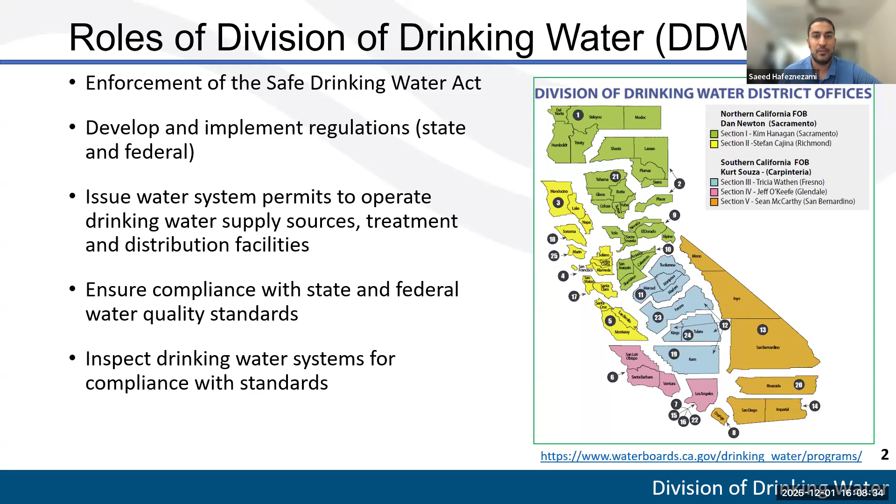So the reason I'm here today is because Santa Clarita SCV has applied for a drinking water permit amendment, which we have been evaluating and preparing the permit for some time now. So here's a little bit of our philosophy on impaired sources of water. So DDW's goal is to assure that all Californians have access to a reliable supply of safe drinking water. And accordingly, it is our stance that the best quality sources of water that are reasonably available to a water system, to a water utility, should be used for providing drinking water.

Extremely impaired sources are those sources that contain or are likely to contain very high concentrations of contaminants, multiple contaminants, or unknown contaminants. An example of these sources are groundwater sources that are subject to contamination from a contaminated site. So we also recognize that in certain cases, the water produced from treatment of these impaired sources can be a potential resource for water systems, especially when other available supplies are limited.

And that's where this process memo 97-005 comes into play to address the inherent risk of using these sources by establishing steps to review and evaluate the proposals for using these extremely impaired sources in a safe manner. So what is this process memo 97-005 that I keep referring to? This is a guidance that was issued to the drinking water program at the time back in 1997, which is now called the Division of Drinking Water. This guidance was issued to our staff on how to permit the use of extremely impaired sources of water for domestic use.

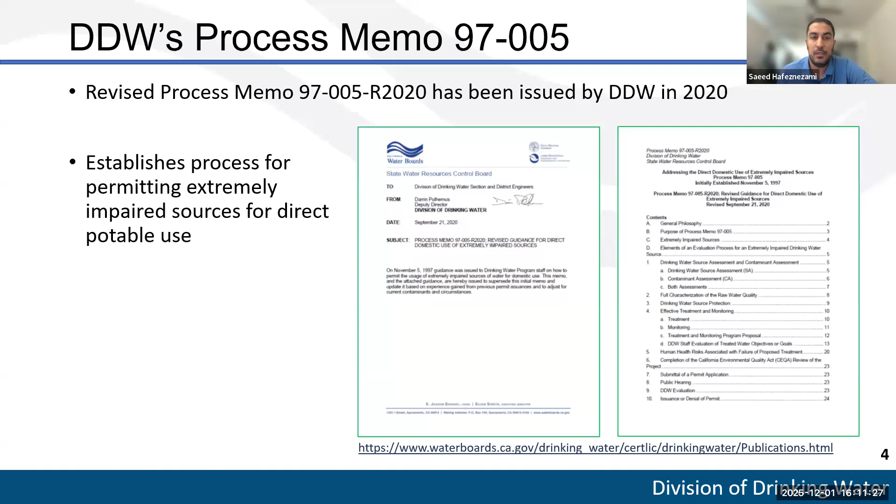So this is just an overview, a summary of what this 97-005 process entails for permitting extremely impaired source projects. I'm just going to briefly go over the overview, and I'm going to spend a little bit of time on each step. But basically, a water system or a project proponent that wants to use an extremely impaired source of water must undertake various steps to gather information and prepare technical reports that summarize the outcome of each of those steps. And these technical reports will be submitted to DDW to help us review and evaluate the permit application. And these are the key supporting documents for us to use in our permit evaluation.

So this process is a hefty, lengthy process. It involves receiving and evaluating an extensive amount of information, data, analysis, and conclusions, prepared by the project proponent and reviewed by our DDW staff. And depending on each project's specifics and specific circumstances and details, we determine whether all or some of these steps are required. These various steps are listed here in the order that they need to be completed. And it starts with drinking water source and contaminant assessment, followed by characterization of raw water quality, source water protection, effective treatment and monitoring, and a risk assessment for the failure of proposed treatment if warranted.

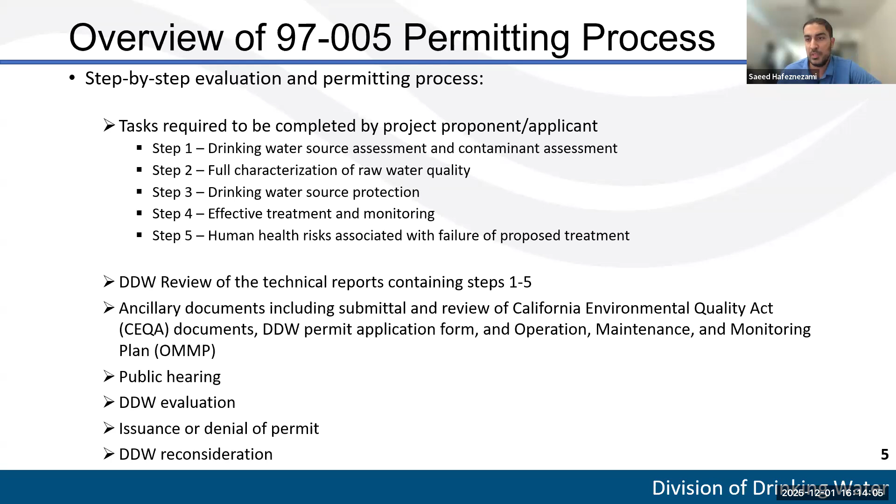And I just want to point out that these steps in this evaluation process are sequential, meaning each step relies upon the findings and conclusions of the prior step. So these are the major 5 steps in the 97-005 review process. And besides the completion of these steps and the review and approval by DDW, there are also other documents and steps that need to be completed prior to issuance of a water supply permit by DDW. And these steps include preparation of CEQA documents, permit application, preparation of an operation, maintenance, and monitoring plan, and also holding a public hearing if deemed necessary by DDW. So that's the reason we are here meeting today, because we require a public hearing as well.

So I'm just going to spend a little bit of time going over each step of this process. The first step is an assessment of the impairment or the contamination. The objective of this step is to know what contaminants are present or are likely to be present at the source, impacting the water source, and also into the future. This is the foundation of all subsequent steps.

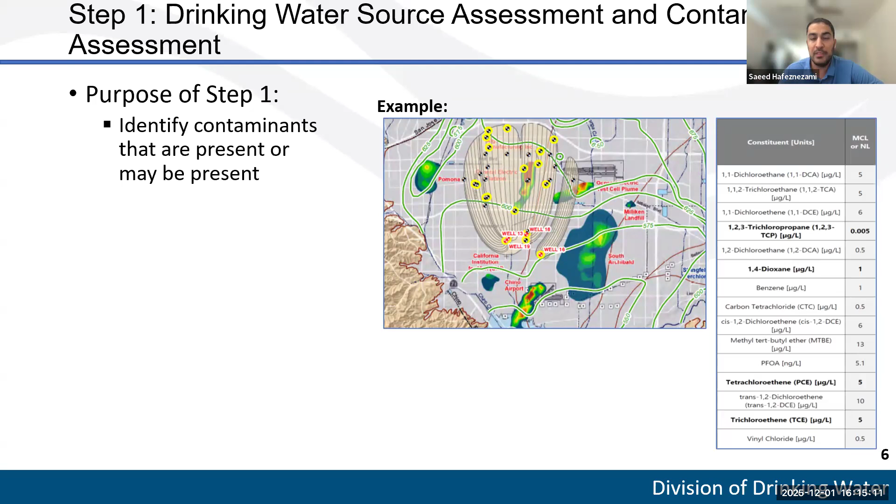Here are some illustrative examples of outcomes of this assessment. These examples are not related to this project, but these are some of the outcomes of this process that we expect to see: maps showing the extent of the contamination plume and tables listing the various contaminants of concern for the specific project. And like I said, a lot of time and effort goes into preparing all this information as well as reviewing it.

Step 2 is characterization of raw water quality. The end product of this step is estimating the contaminant concentrations that will be fed into the treatment system. So the project will need to determine all the contaminants that are currently present or will be present in the future at the production wells, and estimate the maximum concentration of those contaminants. That is the basis for the treatment design. We want to make sure that the treatment system is adequate in treating all the contaminants at the maximum concentration foreseeable.

So again, this process looks at the trends of water quality and concentrations of these chemicals and their variability, and it involves a lot of modeling, mathematical methods, modeling techniques, and different assumptions that need to be described and justified here.

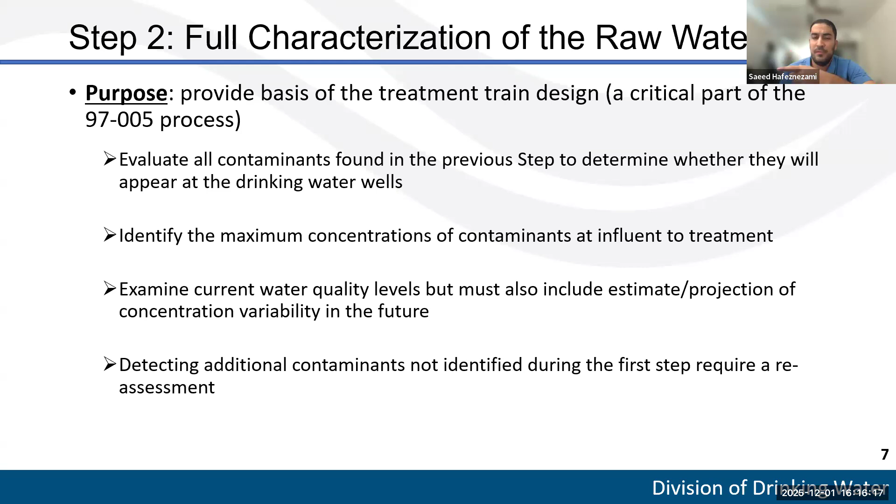Next, step 3 is drinking water source protection. The purpose of this step is to make sure that the water system is on top of all the activities and developments in the watershed or in the groundwater basin over time, and to prevent any new contaminants from getting into the production wells. So we want to minimize the dependence on the treatment.

So we require water systems to have a program in place to do source control, to look at ways to control the number of contaminants or the concentrations from rising into the future. So it's very important for the water system to have a specific liaison, a team to communicate and coordinate with other agencies and other regulating agencies involved with any cleanup programs.

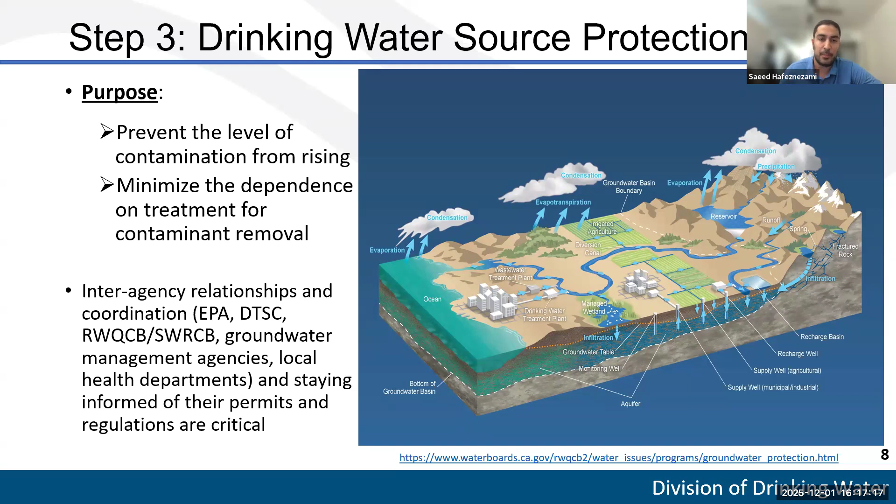Next, step 4 is effective treatment and monitoring. The purpose of this step is to ultimately treat the contaminants of concern for the project to the lowest level possible. And this is where we spend a lot of time and effort, again, reviewing all the details of the proposed treatment technology to ensure that they are performing reliably and adequately to produce safe drinking water.

And given that these projects typically contain a group of contaminants, we must employ a specific cumulative review methodology called the maximum contaminant level (MCL) equivalent approach, which is basically ensuring all contaminants of concern are treated to the safest level possible.

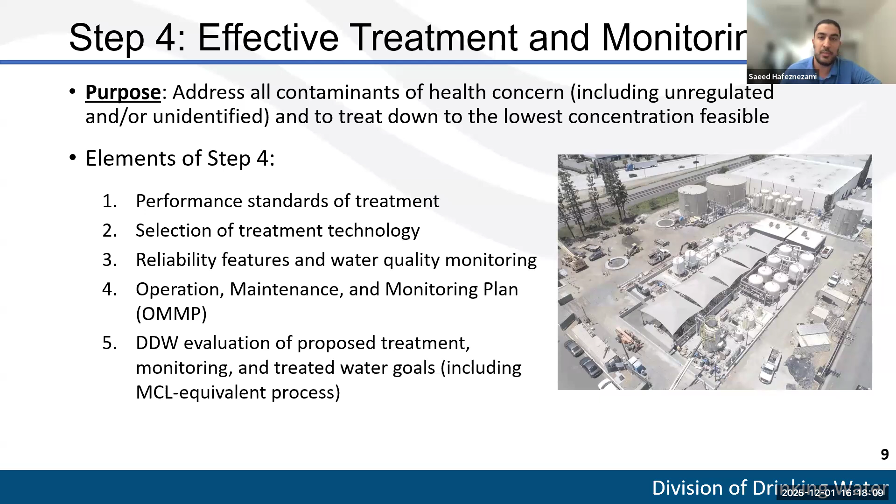And then the next one, step 5, is treatment failure health risk assessment. The purpose here is, if warranted, to understand and quantify the level of health risk that these projects pose if any treatment process could ever fail.

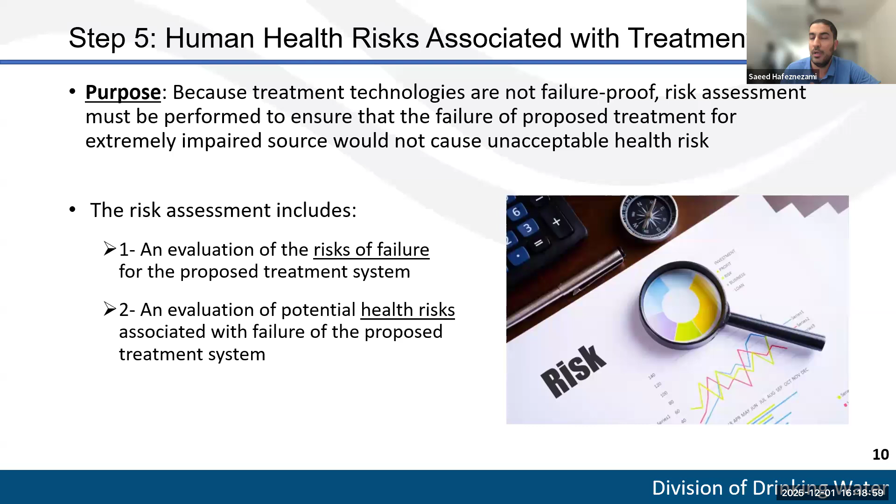So here our goal is to identify any risks and minimize them by requiring additional safeguards that we incorporate into the permit requirements. These could be different types of monitoring, alarms, compliance monitoring, performance monitoring, which are all incorporated in our permit that we issue to the system, and the system needs to have that monitoring program going when starting the operation of the system.

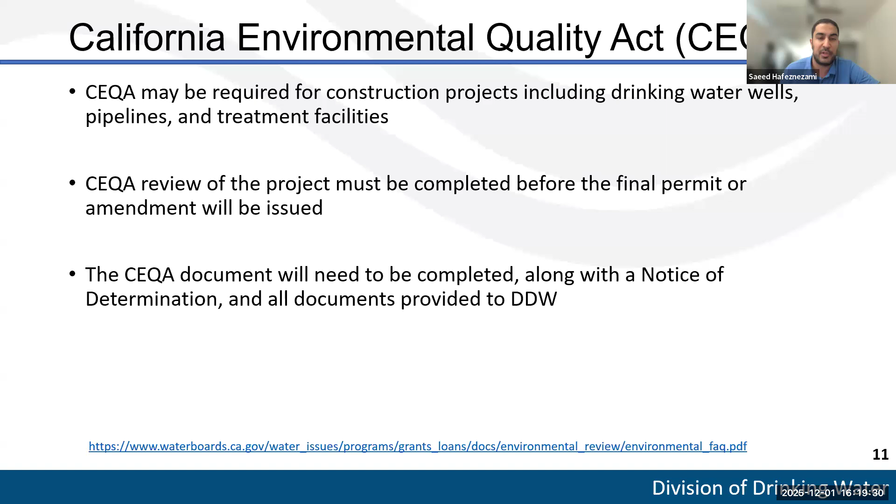So that was just a very brief summary overview of the 97-005 steps. And I should also mention the other items that need to be completed by the projects, such as completion of CEQA requirements, which is similar to all other permitted projects. These projects also need to comply with CEQA, California Environmental Quality Act requirements. And these 97-005 projects, again, are similar to other water supply permits.

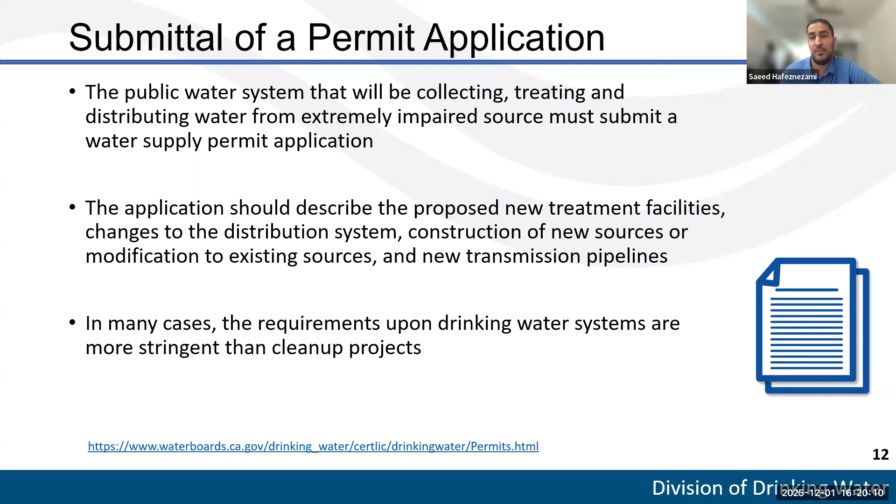So the proponents are suppliers of this treated water. They have to be permitted as a public water system. This is a requirement of the Safe Drinking Water Act. So as part of that process, the water system needs to submit a permit application to DDW for the use of this source, and our job is to evaluate and impose all the stringent requirements on them as necessary for protection of public health as part of the conditions of the permit.

And a public hearing may be needed to ensure that the public is aware of these projects and there's public acceptance of the treated water. We always recommend engagement with the public through various forms of outreach, and one of those methods is holding this public hearing.

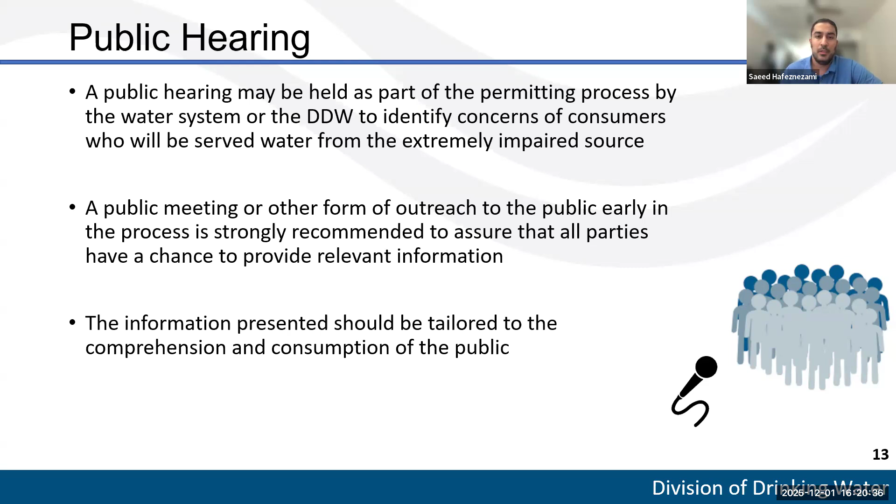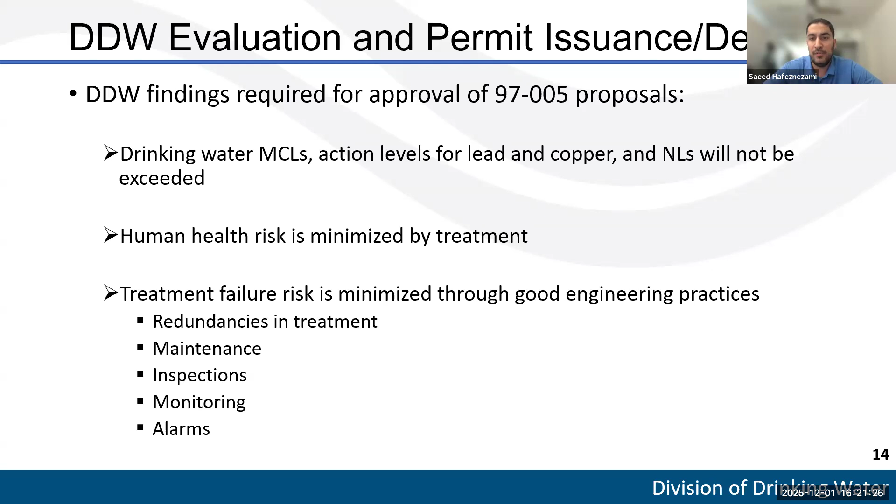And then finally, DDW findings for approval of extremely impaired sources include these criteria that are listed here. So we want to make sure that all the water standards, MCLs, action levels, notification levels for the drinking water are not exceeded. We want to make sure that the human health risk is minimized by the treatment. We want to make sure that the treatment system has safeguards, redundancies, maintenance and inspection, monitoring and alarms. And then at the end of the process, DDW, once evaluating all these different components, either issues or denies a permit for the use of the source.

And lastly, this is my last slide. I just want to conclude by saying that once the project is permitted, once the permit is issued by DDW, our role is not over. As I mentioned before, we have conditions specified in the permit for the lifetime of the treatment plant, including routine sampling and monitoring of the source water, of the treatment processes, and the final finished product water. We also have special monitoring requirements for the upgradient and surveillance monitoring wells to make sure we get early warnings about any potential changes to the water quality down the line in the future.

So we have various requirements for the system to reevaluate different components of the system. And if at any point in the future any of these conditions change, and if those changes warrant, we may have to reopen the permit and make another amendment in response to those changes.

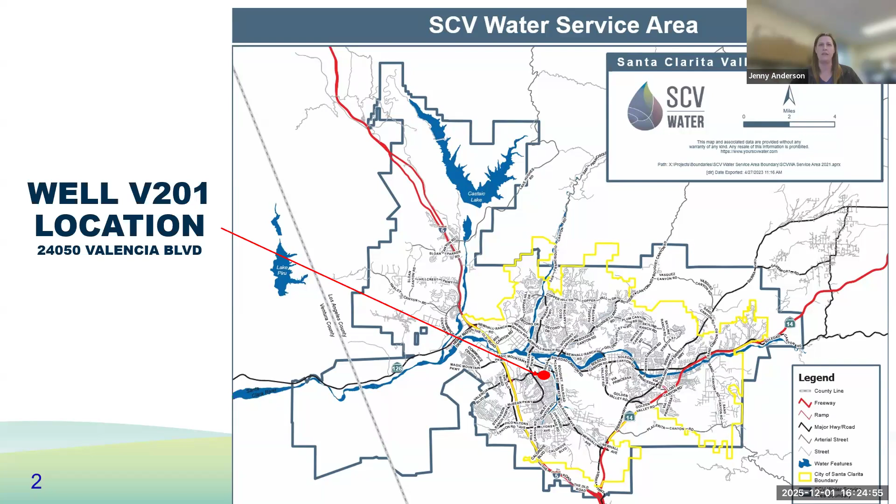So perchlorate and VOCs have been found on the Whittaker-Bermite property, which is located in the center of the Santa Clarita Valley and is just south of Soledad Canyon Road, and it is directly above our aquifer called the Saugus Formation. So this Saugus Formation underlies the Santa Clara River and is approximately 2,000 feet below ground surface. And then just to go over, perchlorate is a component of fireworks, explosives, solid rocket fuel, and then VOCs are a source of pollution generally in the environment, sometimes found in groundwater and underneath certain industrial businesses.

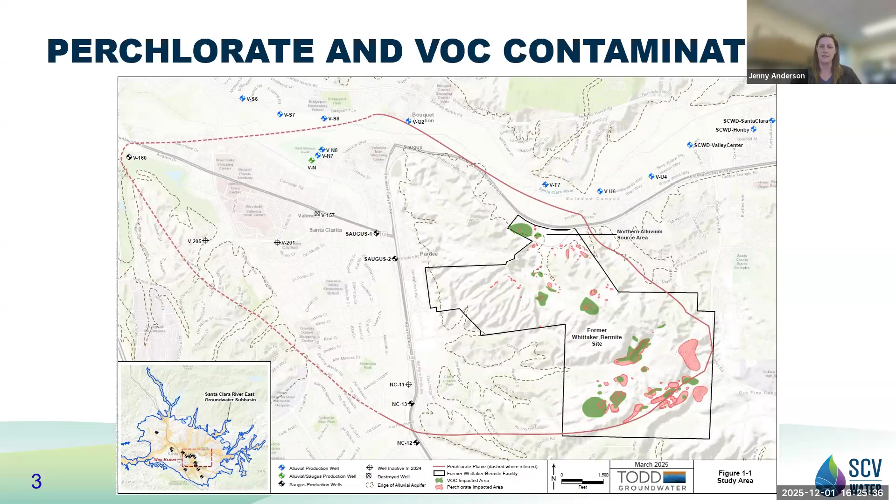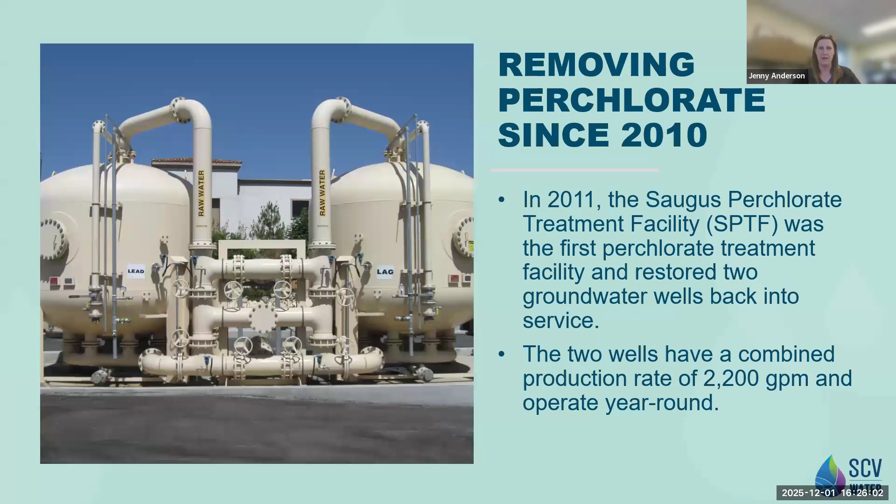Our agency has been committed to removing perchlorate since 2010. Our Saugus Perchlorate Treatment Facility, or SPTF, as you see in the picture there, was our first perchlorate treatment facility in this entire valley. And this facility alone restored 2 wells back into service with a combined production rate of 2,200 gallons per minute, and it does operate year-round.

So 201 was constructed back in 1989, and it is drilled to a depth of 1,690 feet below ground surface. So it is completely in that Saugus Formation aquifer that I was just discussing. We decided to take a proactive approach when we were designing the Well 201 system. We are going to be using ion exchange for the removal of perchlorate and granular activated carbon, or GAC, for the removal of volatile organic compounds, or VOCs.

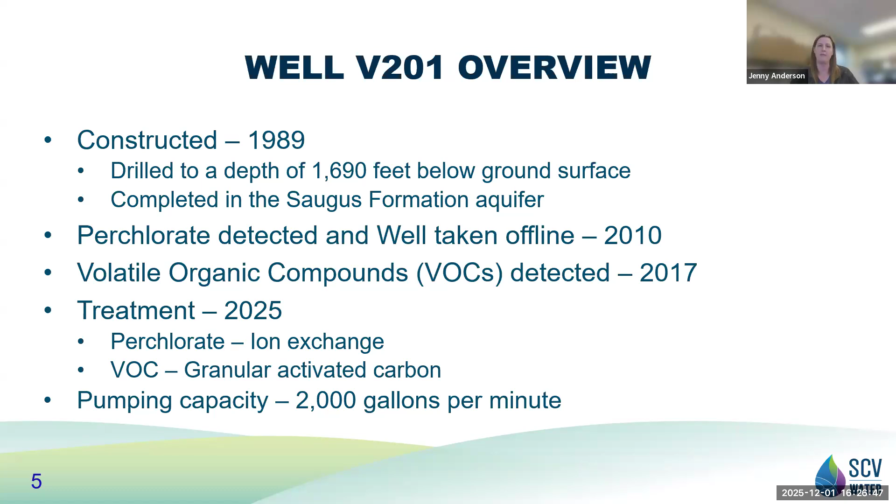And this is going to be restoring nearly 2,000 gallons per minute to our water supply. And that's actually enough to serve about 6,400 Santa Clarita families each and every year. So just as I mentioned, it's going to help increase our water supply restoration, and it's going to increase our local water supply reliability. It's also going to act as a containment well, and it will help pump year round to limit that potential plume for perchlorate to spread further west into other drinking water wells. And then, as mentioned, we're going to be using ion exchange as well as GAC, which have all been known, effective, and proven treatment technologies.

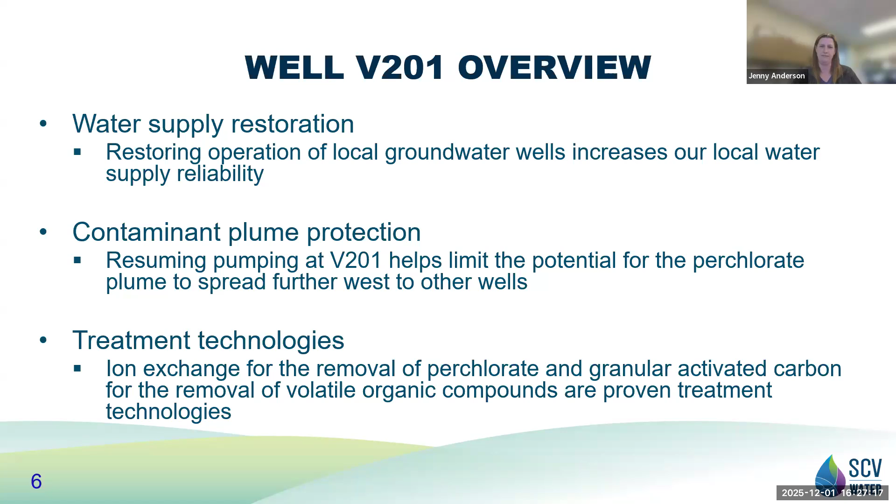So in terms of the water quality for perchlorate, the concentrations have ranged from below the DLR, and that's detection limit for purposes of reporting, up to 18 micrograms per liter. The treated water goal with this system will be below the DLR of 1 microgram per liter in the ion exchange lag effluent vessel. And then for VOCs, we're actually really looking at TCE, or trichloroethylene concentrations, because they've had detections that have ranged from below the DLR up to 1 microgram per liter. And our treated water goal will be below the DLR of 0.5 micrograms per liter in the GAC treatment effluent vessels.

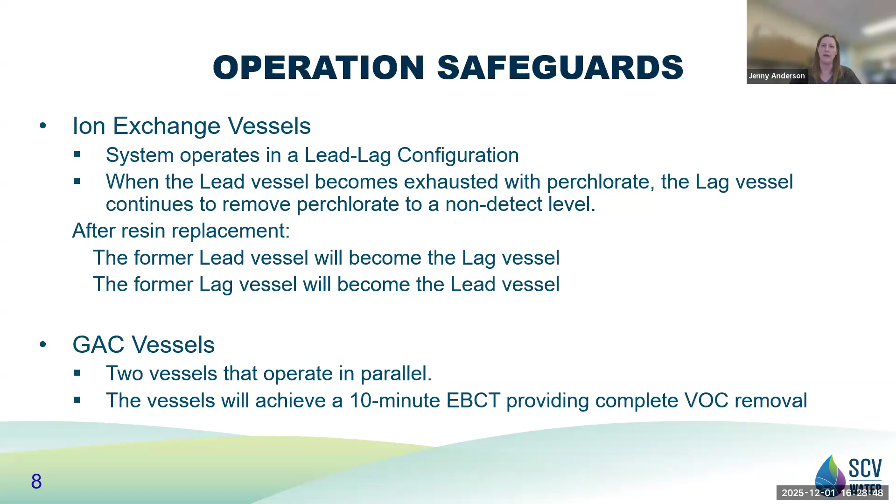So in terms of safeguards, the ion exchange is going to be operating in a lead lag configuration. And what that means is that when the lead vessel becomes exhausted with perchlorate, that lag vessel will continue to remove the perchlorate to a non-detect level. And then once we have a resin replacement, that former lead vessel will now become the lag, and that lag vessel that has already been partially used or has some perchlorate will now be moved up to the lead vessel. And then for the GAC vessels, we're going to have 2 vessels that are going to operate in parallel, and those vessels are going to achieve a 10-minute empty bed contact time to provide complete VOC removal.

And then additional safeguards, we're going to be using Supervisory Control and Data Acquisition, or SCADA for short. And this is going to give us early warning signs of potential issues. It's going to give us real-time oversight of system performance, and it's going to really automate when something falls out of what we would call the normal operating conditions. And then for routine sampling, the treatment facility will be sampled weekly for perchlorate and VOCs, and then additional sampling will occur monthly, quarterly, and annually for other constituents.

We do have triggered monitoring in place for VOCs at the GAC vessel. So monitoring will increase to weekly after we have 2 consecutive monthly TCE or any type of VOC detections at the 50% port. And then our monitoring wells, like Saeed mentioned, we're going to rely on our monitoring wells, which also act as an early warning system. And so they're going to help us detect any potential contaminants moving towards 201 before they reach the well itself. And that allows us to actively respond and to be able to protect the water quality at 201.

So for the project history, we've been working and collaborating with DDW for nearly 10 years to restore well 201 back into service. Last year in 2024, GAC was added to the permit to remove low-level VOC detections. And then this past September, DDW came and actually completed a site inspection at the 201 treatment facility. And then we are excited to have our first GAC treatment for VOC removal placed into service before the end of this year.

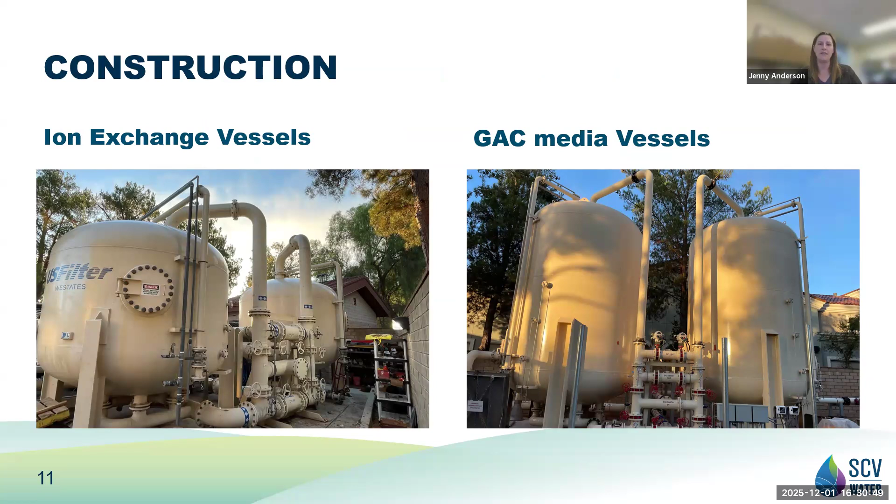So construction, these are actually pictures from the 201 treatment facility site. So you can see on the left, you have ion exchange vessels, and they operate in a lead lag configuration, and the GAC media vessels that operate in that parallel configuration.

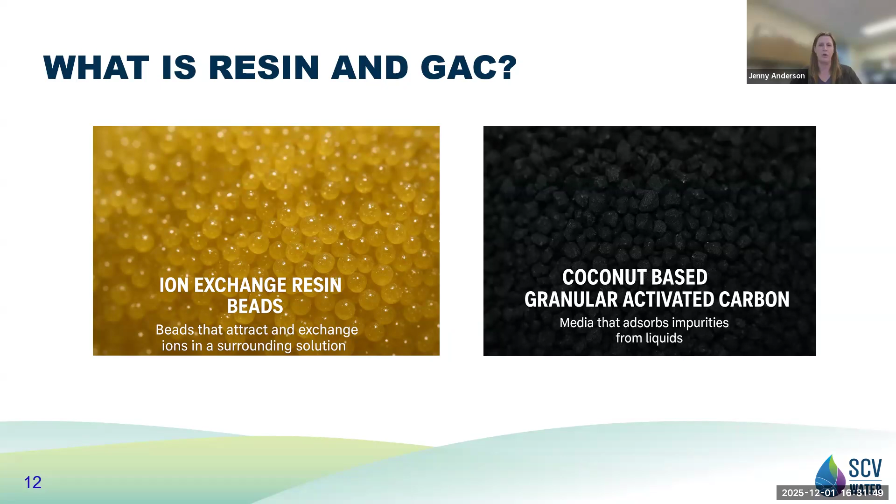And think of them as like magnets, where they'll be attracting and holding on to specific ions and releasing others in a process called ion exchange. And then for GAC, we're going to be using a coconut granular activated carbon, and it's actually a filtration media made from coconut shells, and they're heated up at a very high temperature and essentially activated to create millions of tiny pores. And this allows the tiny pores to have a larger surface area so that they could effectively adsorb or grab onto contaminants as water flows through it.

So our return to service, as we are doing right now, we are currently under the public review comment period, which ends later this week on December 6th. We will be completing water quality samples by the end of this week. And once we receive the results, we'll be reviewing them and then submitting those results to the Division of Drinking Water for approval. And then DDW will issue the final permit and the well will be placed online. Are there any questions?

Sorry, I clicked my audio button, but it didn't come on. Thank you, Jenny, for your presentation, Saeed, as well. I do want to address some questions that we have in the chat and allow others to process the information as we get going. First question from Ms. Planbeck that I'm seeing second, but it's good to respond first.